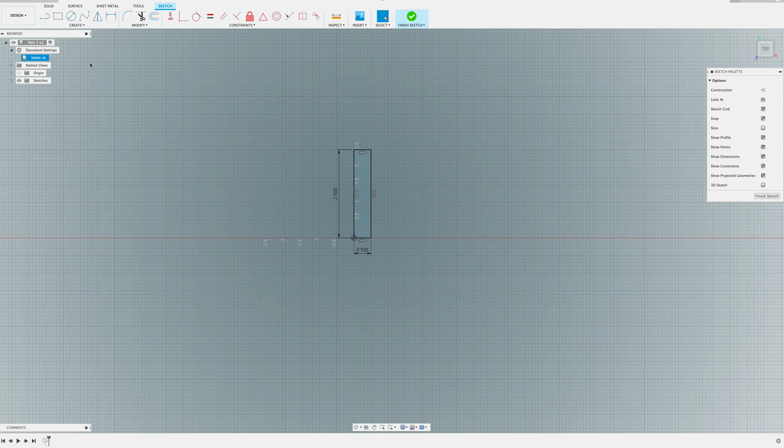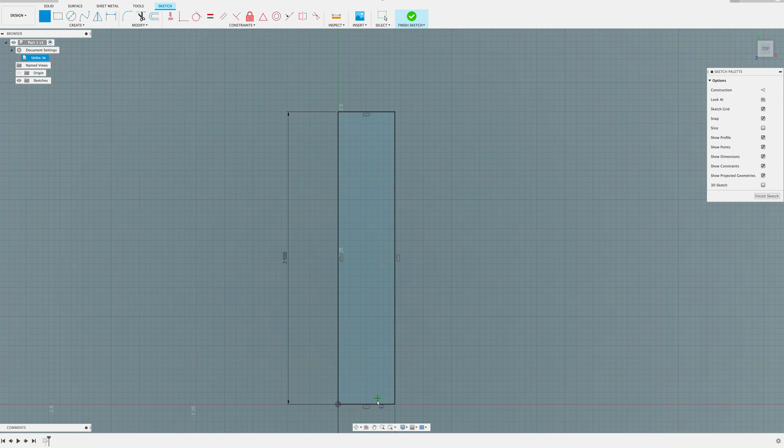Okay, there's two ways you can do it. You can draw it with a line tool, or you can do a spline, or I guess really you could combine a little bit of both. So I'm going to do a line on the bottom, and you can see that I can pick any point here, but it does need to start on the line. It can't be up here. It's got to start on the line. And then I'm just going to put a little, what's called a boat tail. If any of you guys have been shooters before, you know what a boat tail is on the back of my projectile.

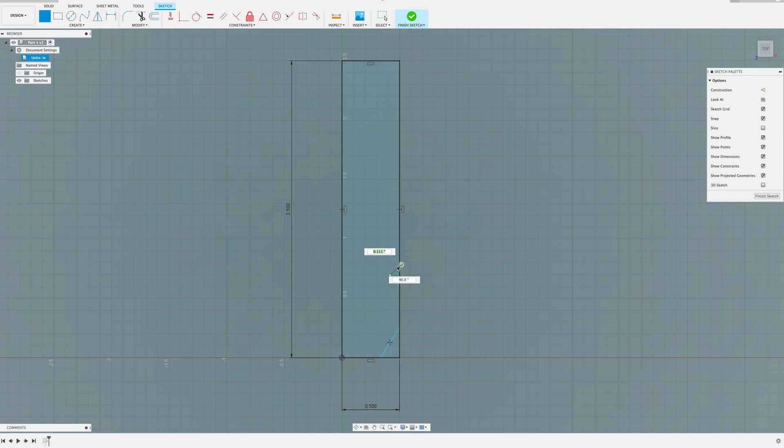Now let's show you the spline tool. I could continue, by the way, to make lines. If I wanted to make a groove in it, like a triangle groove, I might come like this and do that right there. And so it would have a groove, a ring that goes around the whole side. And I can still move those around, by the way, after I stop drawing lines.

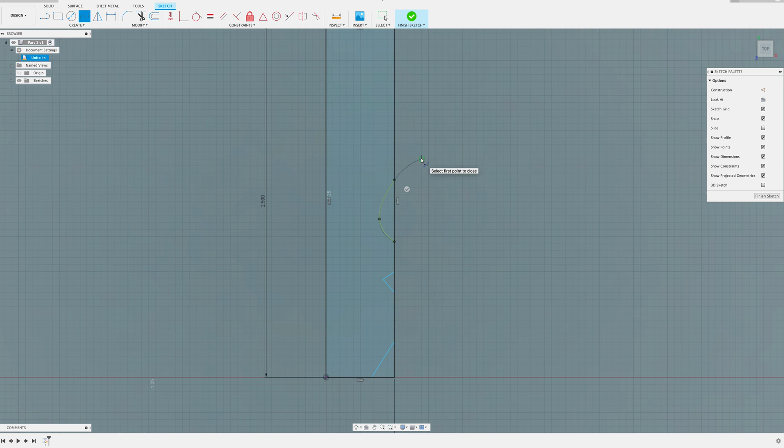Okay, the next I'm going to show you is the spline tool. This one, instead of straight lines, does curves. So for a second we'll just show you that I could do a curve. Once I'm done drawing the spline, it thinks you want to continue drawing something until you push the enter button. And then I push enter and it's done. Okay, so you can see here we now have a curved line with several points: the first point, this middle point, and the end point. And I can still move those around however I like.

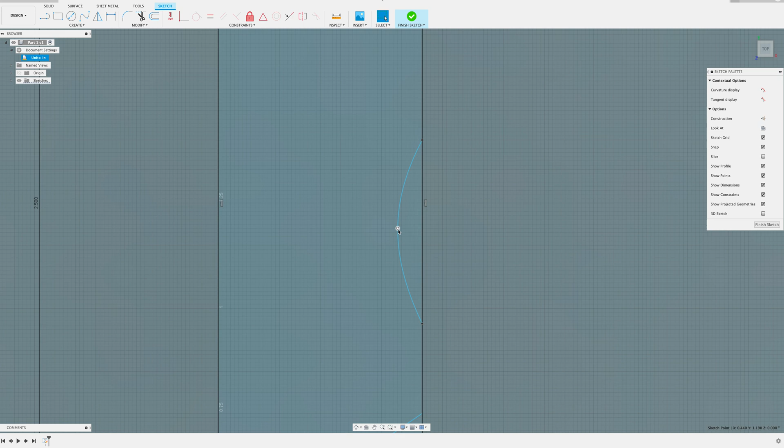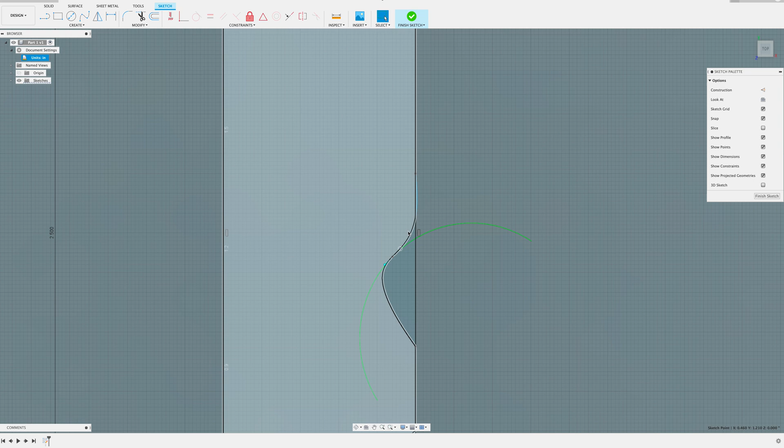And then if I click on the point itself, it gives me this green line that allows me to actually do some funky things with it. Be careful as you monkey with this, because you can twist it to the point where this line comes outside the profile, and it won't fit in the barrel of the cannon. Okay, so make sure that you keep it in such a way that it stays inside this original square.

Okay, and now I'm going to show you the pan just real quick. I just move this down if it starts getting off my screen. And then the escape button on my keyboard, the very top left button, stops panning. I'll do one more thing to show you just as another idea. If I click it, I could do this with a square or a circle.

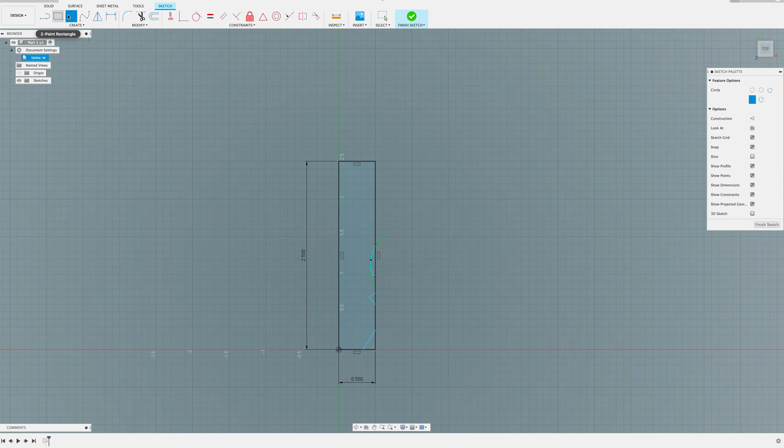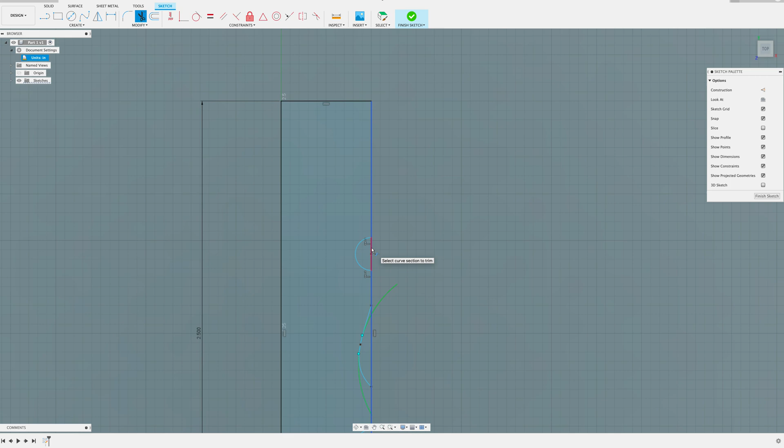But if I were to make a circle in the side of my projectile like that, and then come here to these scissors, I click on the scissors and I can cut off what I don't want. If I'm touching what I don't want, it turns red, and I would cut that, and then I could cut that. And you can see that it now makes that indentation into the side of it, similar to what was happening here, only it's perfectly round. And I could do the same thing with a square. Half of a square could be in it.

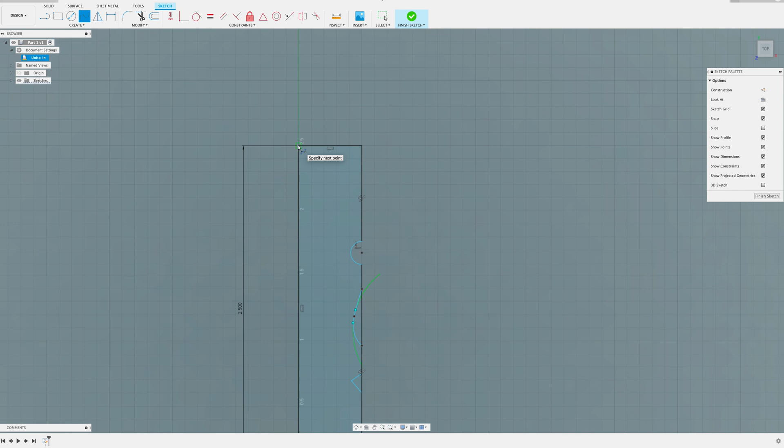And then for the last part, I'll just do a simple little spline that comes from the point. And again, you guys get to pick what your profile is, and you can use one or all of these methods that I'm showing you. Again, I've got to press enter to say I'm done with the spline. I can't click again. Just push enter and then it's done.

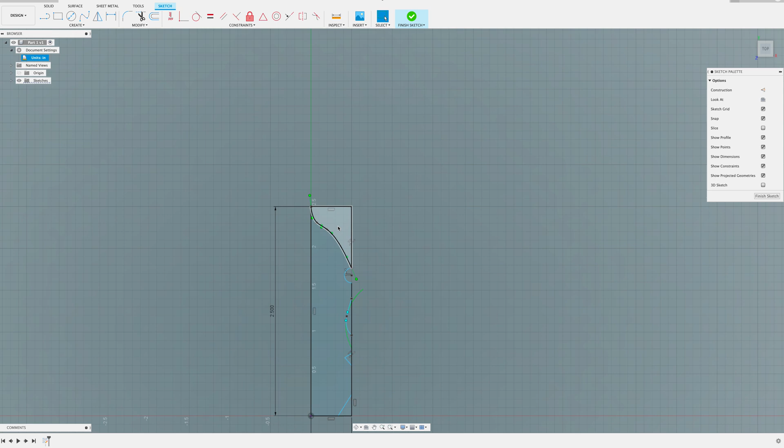Okay, once you have your profile of what you want your projectile to look like, it has to be solid. You'll notice how when my cursor is on it, it turns gray. This also turns gray, and this turns gray right there, and this one, and that one. I want the main bullet to actually turn gray, so you'll need to watch that. So that makes sure that I'm right.

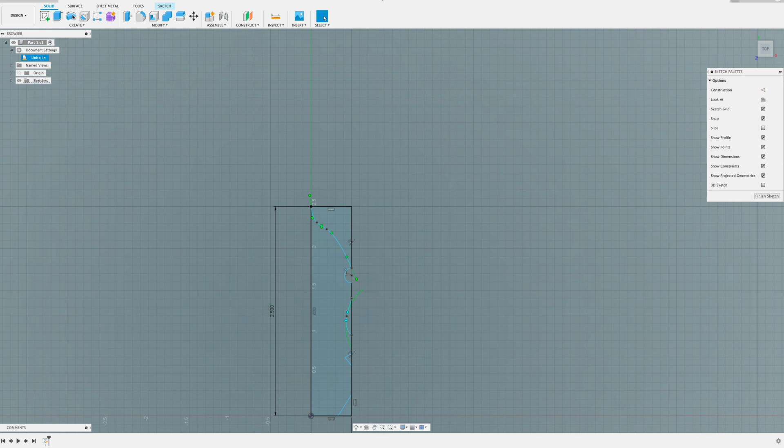Okay, with the dice, you went ahead and clicked Finish Sketch, and then you were able to click on the solid options. I'm going to show you that you can go straight to solid options here by clicking on that solid button, and then go straight to a revolve instead of exiting the sketch first. But otherwise, if you click exit the sketch, you would get this same menu, and you would just click revolve again.

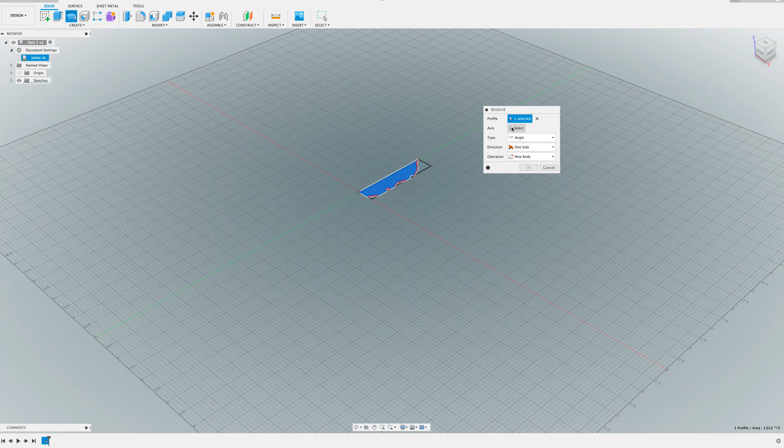Okay, so when I click the button, I get this nice window that gives me all the options. First I select the profile, and you notice that it's blue. That's where the gray portion of my projectile is. And then I'm going to select the axis that I want my projectile to revolve around, or the pivot point. Those of you who like basketball should understand that. Okay, so when I click that and it's blue, it's now looking for me to select a line. And you can barely see it, but it does turn blue when I select that line.

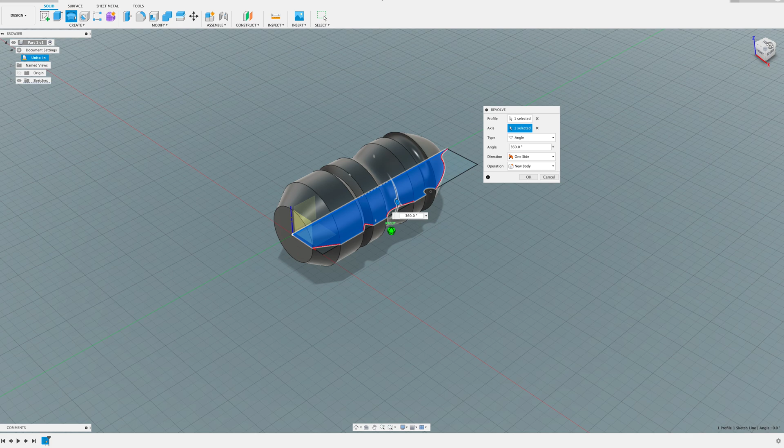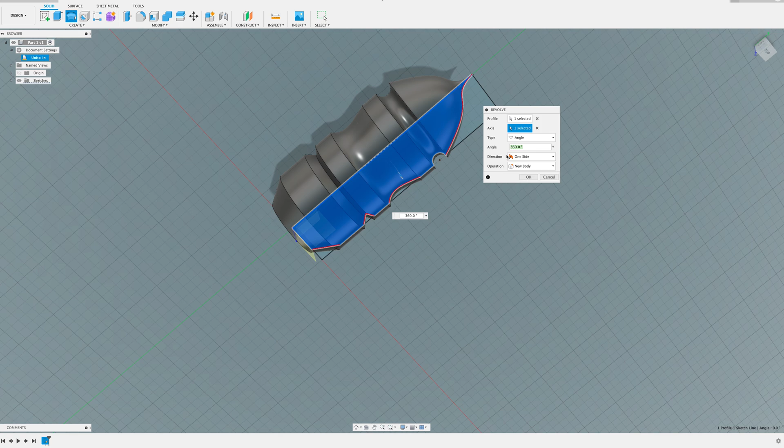And I click there. Once I do that, it automatically gives me a preview of what it's going to look like. So all you'd have to do if you like it is say OK. Before I do, though, I'm just going to point out that you could change this angle to be more or less. So let's say I only wanted it to go 180 degrees. If I revolve around, you'll see that that's only half of the bullet. So in order for you to get all the way around, it has to go 360 degrees. So don't accidentally change that. And then once those are all selected, you say OK.

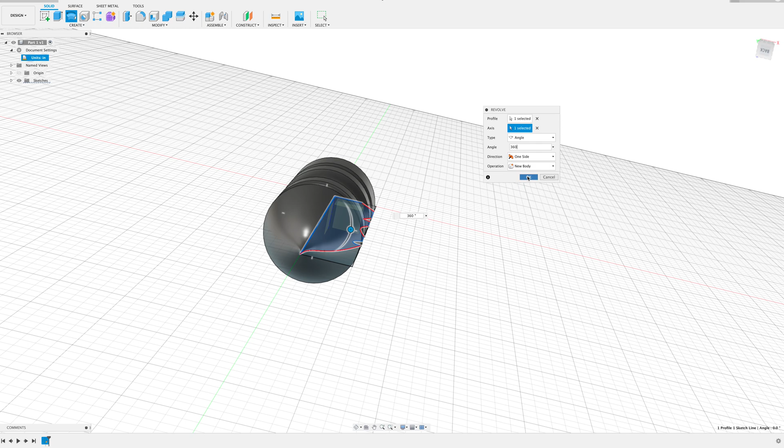And that, my friends, is how you do a revolved projectile. You guys can pick any shape you like as long as it stays within that square, and do part 1.